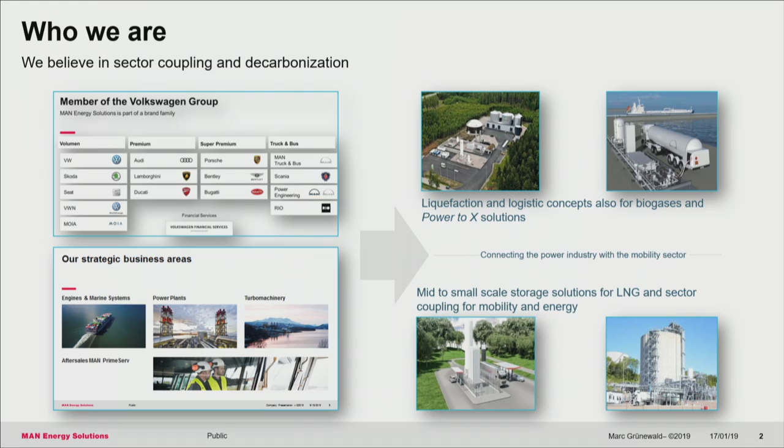And we are, as MAN, by 1st of January, not anymore part of the MAN SE. We are now belonging 100% to the VW group, a 100% subsidiary of VW. People will figure out that we are, as a company, with our strategic business units -- mainly engines and marine, which is the power business, and turbomachinery, as well as a worldwide-acting PrimeServ organization -- somewhat not typical for the VW group, where they are producing cars and others. But in a world which becomes more and more green, and even the cars becoming more and more green, there are maybe some more synergies which you will see in the future.

One thing I address here on the right side is that for us, we do see a lot of links in the world of tomorrow, even for engines, because there will be a need for green fuel, and there will be a need to look for solutions like liquefaction, biogases, power-to-X, and things like that, which will help us reduce CO2 footprints -- whether you use engines for e-mobility or others, that will be interesting for ships, for airplanes, and so on. So this is really going to be a story in the future, and one we believe will be quite interesting.

And one step there at the beginning is for sure even the transition to LNG and others, and we are engaging in that.

So now let me come to what really is the happening and what had happened, because when you look at the future for our industry, what kind of power plants we can sell and what is in the interest of our clients, we have to look at what drives today's energy market. We have to look what has happened - there have been disruptive changes in the merit order and in the energy industry. I'll take Germany as an example, not because I'm very familiar with that, but because I think it shows worldwide what will go on. Then I'll focus a bit on what's needed to make money in the future in a decentralized world.

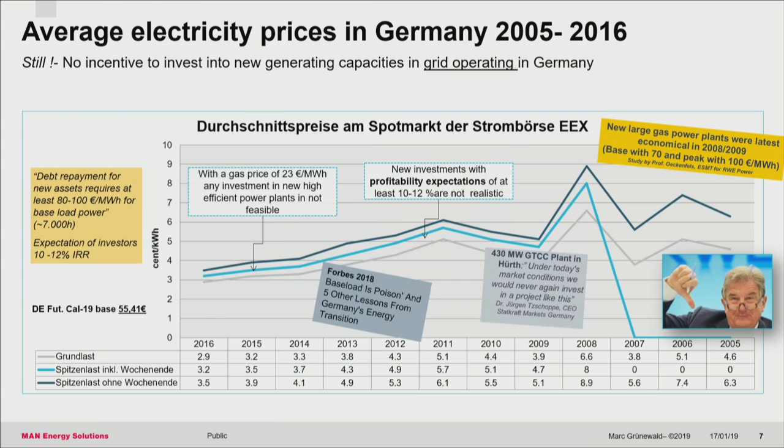Then when we were building them in that period, something happened which nobody really expected. The prices didn't go up. The prices stayed. All the intelligent guys doing this planning and strategic thinking made investments, lots of billions were invested, but the profitability didn't come. So what happened? Why is that, and what was really the situation?

Here we have something we really have to look at: what really happened with our installed power. The renewables in Germany at this time were driven by the EEG, a German law, and we gave subsidies. The wind and solar got their subsidies and could invest in this kind of equipment and installations without any risk. But today we have a totally different world, and we have another price level even for the renewables. So this is a good learning story.

This shows pretty much that at this time the investment in solar and wind really came up. We had always around 120,000 megawatts installed, and we thought we had to go up with fossil fuel. What really happened was the wind and solar came in, and from a position nobody really recognized as relevant in the market, they became a real relevant player. At that time, specifically in Germany, this energy came into the market and had a huge impact because it totally changed the game.

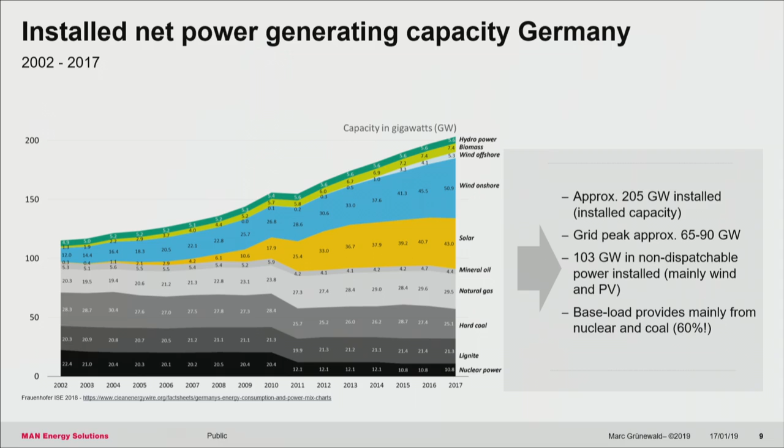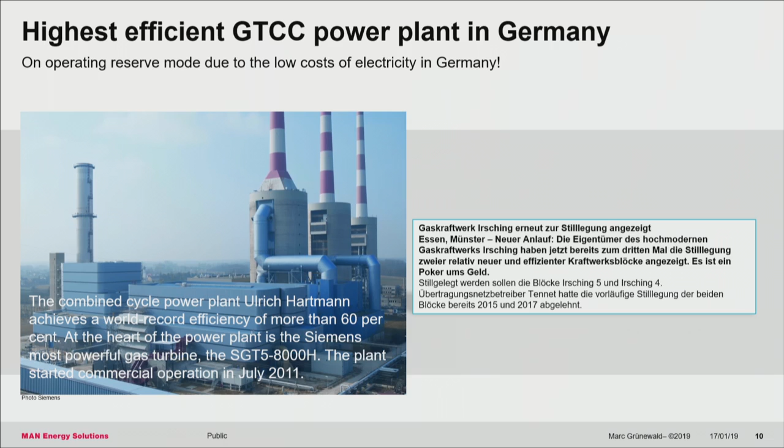Now I'm still describing what really happened. A plant like Irsching, which was invested in at that time, was one of the most advanced plants with 60% efficiency. Siemens did a lot there, E.ON invested a lot. They wanted to shut it down twice, but the load manager, the TenneT driving the grid at that era, said no, we need it for the grid, so you're not allowed to shut it down. Commercially it was a disaster, so nothing happened.

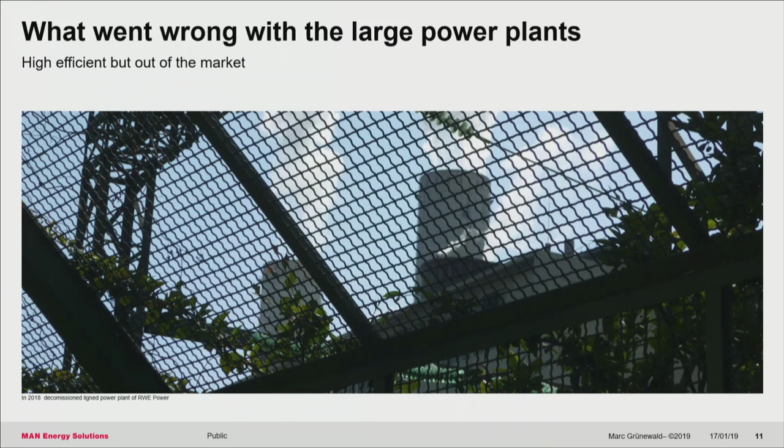So what really happened at that time was something went wrong. They were highly efficient, people built the most efficient power plant, but it was out of the market. That happened to Statkraft in Hürth, and it happened to others as well. So why could this happen, and why could brilliant engineers and brilliant managers like us make that investment and lose hundreds of millions, to be honest? Let's understand it and look at what really happened there.

Let's go back to how it worked, how it was managed, and how the electricity price is created on the German exchange. The fact is we now still have around 80 gigawatts as peak load, and we now have some new influence factors, like having to look at the weather forecast, which was not really something that affected anybody in the past.

But now you have to look how is the wind tomorrow, too much sun, because we have these kinds of energy which feed in, and this feeds in with priority. No matter what, now we have the situation that these renewables have at all times priority. They are feeding in, the system operator has to manage it, and for the rest of the power plants in the world, this means you only can produce when no wind and no sun is available.

So now things get a change, and the change is quite interesting. We see now that in that market, in that range, wind and PV steps in. Beside the fact that in Germany, due to the fact that it was subsidized, they were coming in at zero price, so it was just power which came in, and the consequence was your power plant, which was calculated to sell at 3 or 4 cents based on your model prices. Now there were 40,000 megawatts right now coming in and pushing the prices down because they're in for zero.

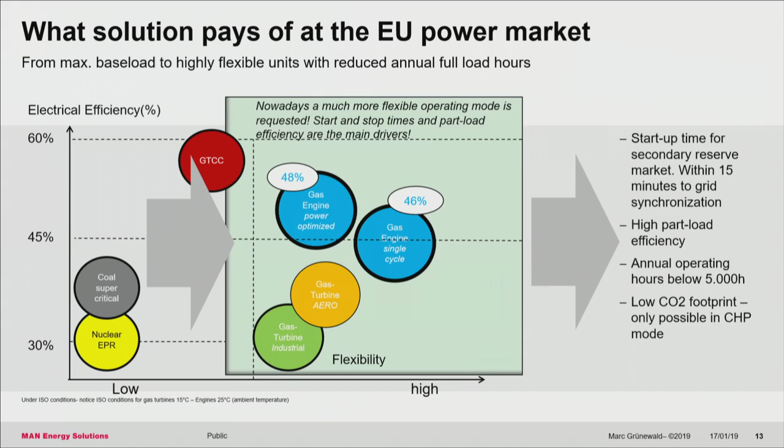So there are new things bringing in the key decisions where you have to look, and you have to look much more on high efficient part loads, starting times, backup load, and so on, and you have to look at the CO2 footprint. So this brings us then to the question: can we produce in such a market, and do we have a chance in such a market to act with a baseload plant?

My conclusion on that is I just made a simple financial model based on the 2018 prices for a 100 megawatt power plant. We took 5 of our gas engines, output is about 95 to 100 megawatt net, we took 46% efficiency, we did the gas price at 22 euro, we calculated with an EPC price at about 600 euro per kW. We did a typical project financing, 30/70, we brought in construction time of a year, we even included some CO2 costs, starting costs, startup times, and then we calculated what is going to be our generation costs for such a power plant.

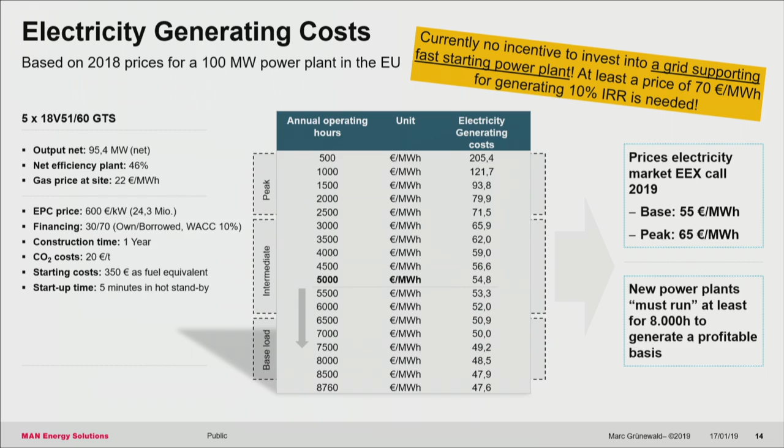And if you look at the figures in the middle, you see you need around 5,000 hours to cover your costs, which are around 55 euro per megawatt. Below that you're still making losses. To be profitable, such a plant in a market should run roughly between 7,500 to 8,000 hours. Then you may create a little bit of money to be able to generate some returns. So this is why I'm stating here, you need this 8,000 hour baseload to be profitable with that kind of baseload equipment. So that is very unlikely to happen.

So there are now other key components which drive investments in these kinds of power plants. For the EU market, and I'm talking first about the EU market here and in Germany, solutions only pay off if you have a couple of things. You need high efficient prime mover technology because you need low CapEx, short construction time, lower CO2 emissions.

Then absolutely important is the combination of power and heat, the CHP solutions. Normally right now, most of the people we are talking to, the utilities, all the people who are looking for it, they want CHP solutions because there are even some fundings and some money behind that. It allows you to do that, but it gives you much more efficiency and brings you, let's say, twice the money you get if you only produce power. And you have to be able to serve the regulation for the market there.

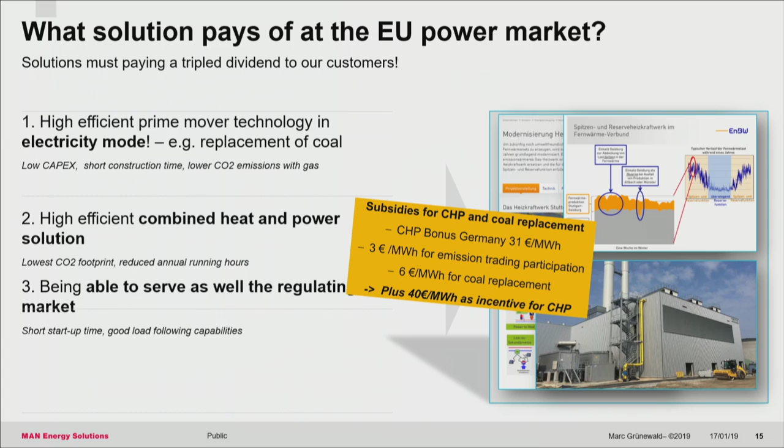You have to start within 15 minutes and you have to think about serving primary reserve, secondary reserve, things like that. This is for sure always something which you have to consider as well when you think about new projects.

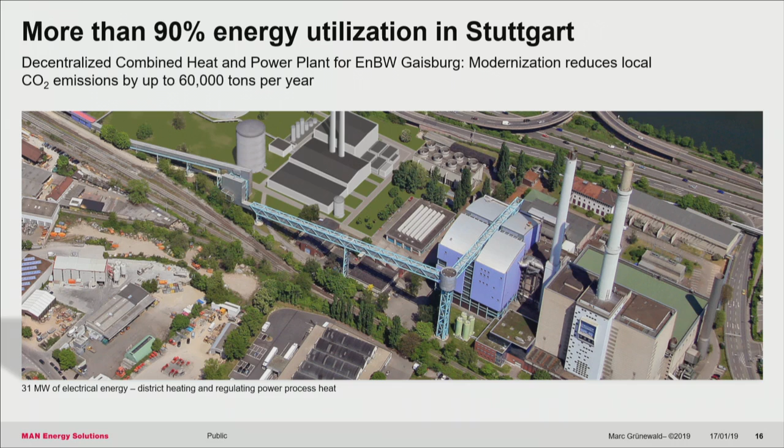Here is the next slide, a German example. This is EnBW, where we are building a 30 megawatt combined cycle for district heating as well as utilization. This happens often now and in the future because they are shutting down their old coal-fired plants to reduce the CO2 footprint. Then you look for a CHP solution, and these gas engine solutions or others are quite interesting. So we are not talking about a 400 or 500 megawatt plant, we are talking in this range about 100 to 250, whatever.

When you look in Germany at all the investments made recently, Mainz-Wiesbaden, 10 times 10 megawatt. When you look at the other one in Kiel by Jenbacher, that's even in the range where people are looking for gas engines, 5 or 10. So you have flexibility, you can shut them down, you can operate according to the grid. So the chance to go for a gas turbine, which is really effective when you can run it on base load, is much lower in our system right now.

This is specific to Germany and Europe, but there will be other markets worldwide where there's still demand for base load and other solutions. But here in these markets right now, it's very difficult. So what does this mean?

The future is much more decentralized. Take that picture as an example, that could be a large city or a city which has to be built up in Africa or whatever, where they're doing their planning, all thinking about decentralized solutions. Why? Often in most emerging countries, the grid is not available, there is no grid. And the question of how to manage things becomes much clearer if you look at a decentralized solution. This decentralized solution could be a city with a couple hundred thousand or a million people, even looking to secure their own energy supply.

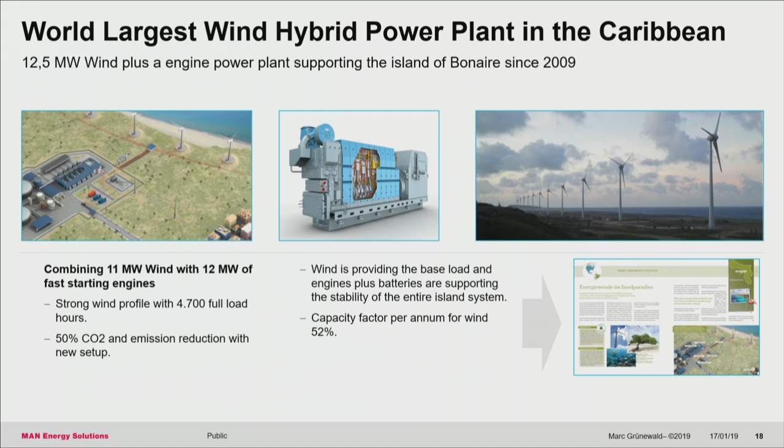So even this is interesting. This is all daily business work, and this is just an example which is right now coming up: we are building an LNG power plant in Gibraltar. This shows that people are looking for these kinds of solutions where you get your supply and bring your gas in there and look at how you can act there.

I want to look more specifically now at the future and highlight something I mentioned at the beginning. Germany is still a good example because we're saying renewables is the new baseload, everything is fine. We decided to do the decommissioning of the last nuclear power plant by 2022. Also, the fade-out of coal is politically absolutely clear, and it looks like it's going to be around 2030.

And then have a look at what the challenge is. These three kinds of energy - nuclear, lignite, and coal - they are producing together 52% of the kilowatt hours we are using. So it's 290 terawatt hours.

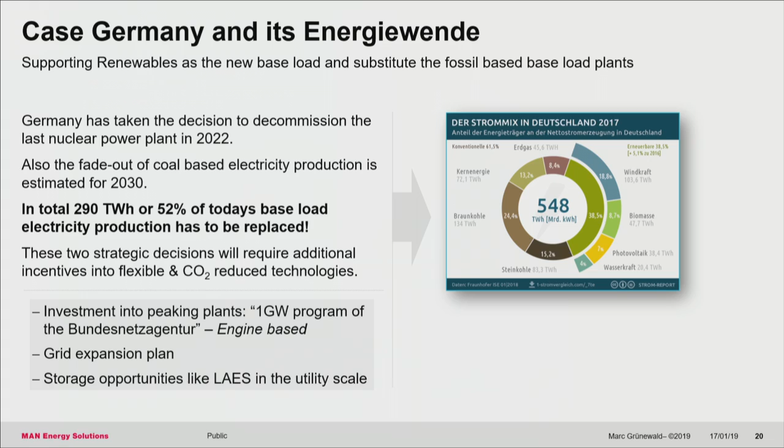So now we can discuss again, what does this mean if all this goes out? We can install as much as we want in wind and solar, but they will not produce the energy at that time when it is needed.

So we will have not only grid securing stability issues, but if you think about e-mobility, and if you just do the calculation - what does it mean if you're having 100,000 Teslas in a city like Munich? It's 10,000 to 15,000 megawatts you need for 20 minutes.

So let's do this on a bigger range and discuss millions of electrical cars. There will be a lot of additional capacity and load which we need for 20, 30 minutes somewhere. For the time being, it's not a problem - the system is stable enough with 200,000 megawatts. So for the next few years, this is not going to be an issue.

But let's have a view on the long term. On the long term, there is baseload which will go out, and I do not see that you can fill this gap only with renewables.

Even if we are building renewables with all the storage solutions we were talking about, there's still going to be a need - not only for grid purposes, but because we will need load. It will not be the 7,000-hour plant, it's not going to be like this. It's going to be in a more flexible way, and new things will come up.

But this is something which is quite interesting and will have an impact, and I think we are not discussing this on a long-term basis. In our industry, if you talk about energy and power, you need to have a 10, 15 year perspective. Based on that, something like this will happen and will have a huge impact on our system.